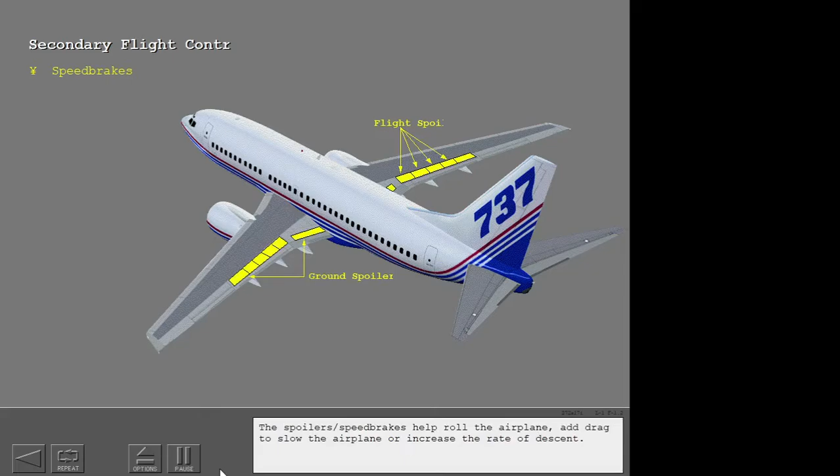The secondary flight controls add lift or drag and help in flight path adjustment. The spoiler speed brakes help roll the airplane, add drag to slow the airplane, or increase the rate of descent. The leading edge devices add lift for slower approach and landing speeds. The trailing edge flaps also add lift and drag for slower approach and landing speeds.

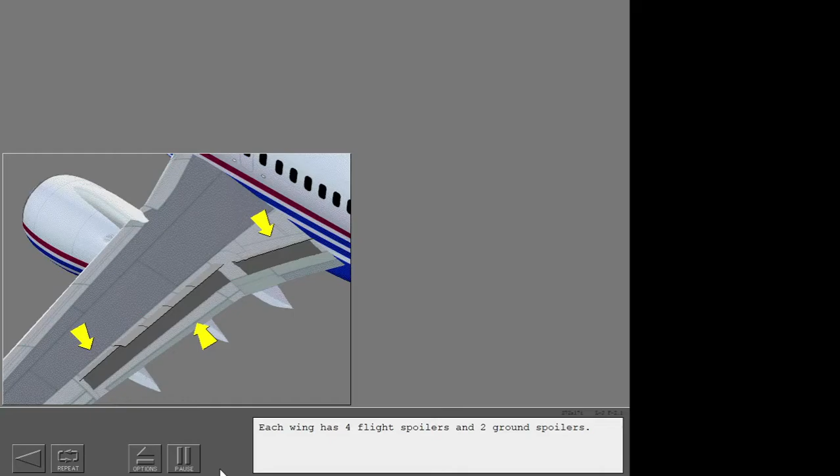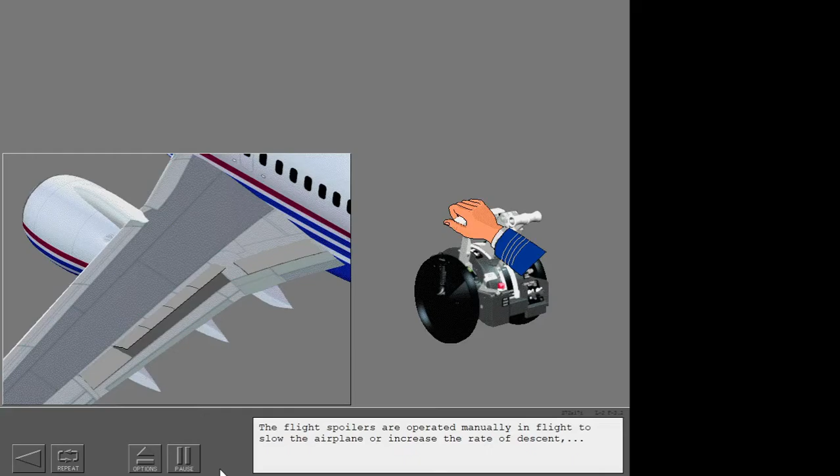Each wing has 4 flight spoilers and 2 ground spoilers. The flight spoilers are operated manually in flight to slow the airplane or increase the rate of descent, or automatically to help the ailerons in roll control. You must be careful when you operate the flight spoilers manually and the airplane is turned, because the airplane roll rate can quickly increase.

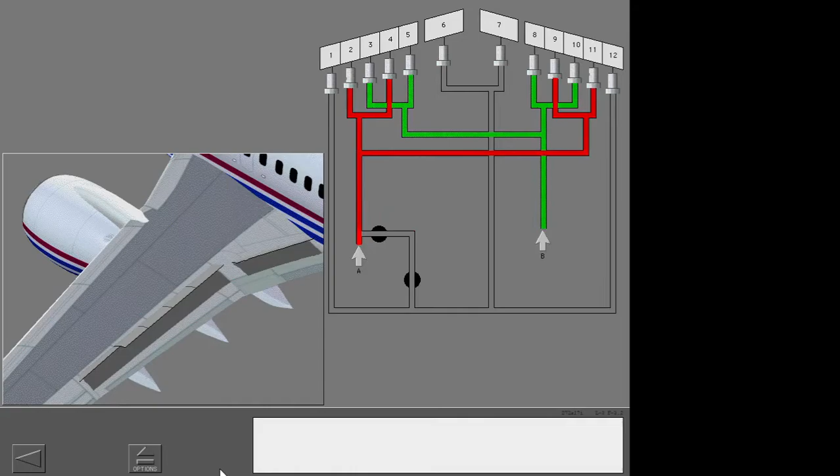The ground spoilers operate with the flight spoilers on the ground. The flight spoilers use hydraulic systems A and B. The ground spoilers use hydraulic system A.

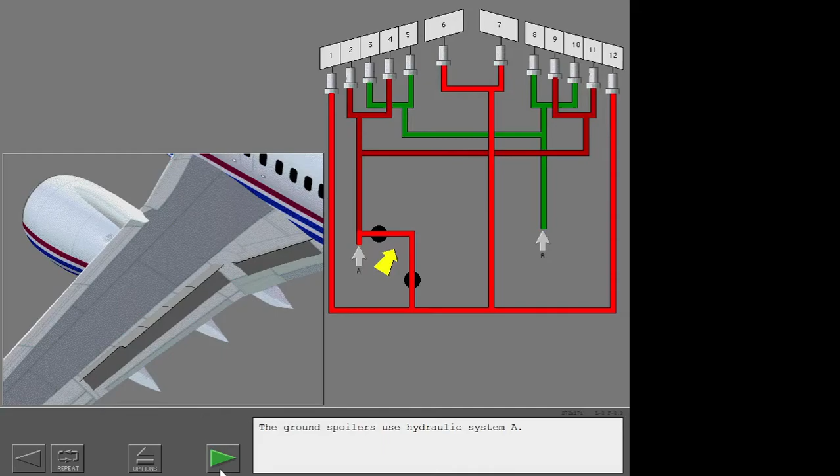The controls and indicators for the spoiler speed brakes are found here. The speed brake lever is on the captain's side of the control stand. In the down detent position, all flight and ground spoiler panels are down. The armed position is for automatic operation.

In the flight detent position, all flight spoilers extend to the maximum position. In the up position, all flight and ground spoilers extend to their maximum position. The up position is used only on the ground.

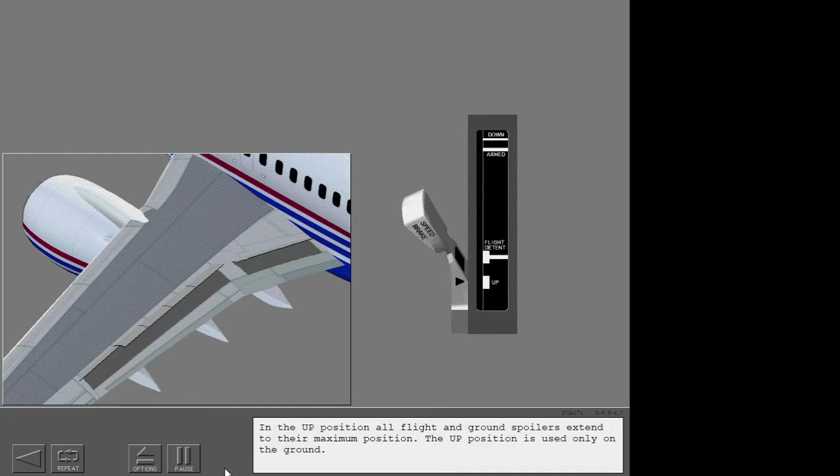The speed brake armed light is on the captain's instrument panel and shows that the speed brake system is armed for automatic inputs.

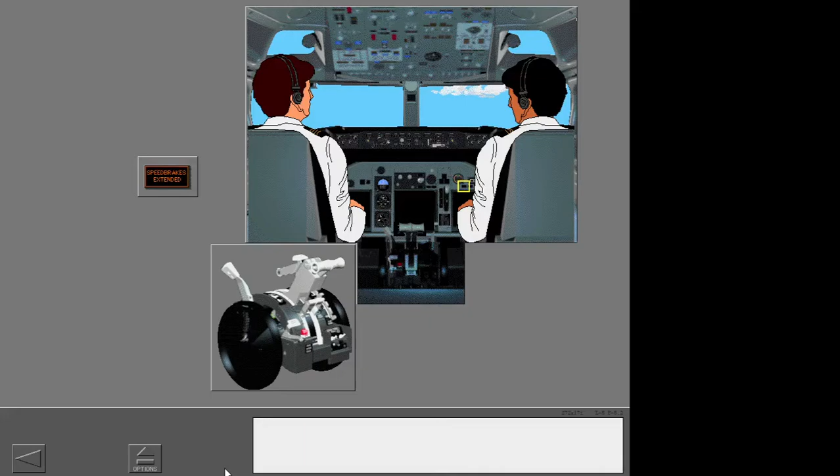The speed brake's extended light on the first officer's instrument panel illuminates in flight when the speed brake lever is out of the armed position, and the trailing edge flaps are extended to more than flaps 10, or radio altitude is less than 800 feet.

The speed brake's extended light illuminates on the ground when the speed brake lever is in the down detent position and the ground spoilers are not stowed.

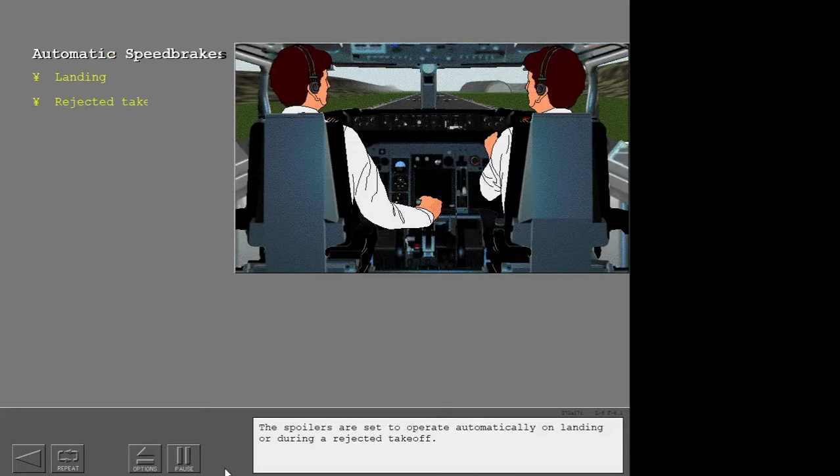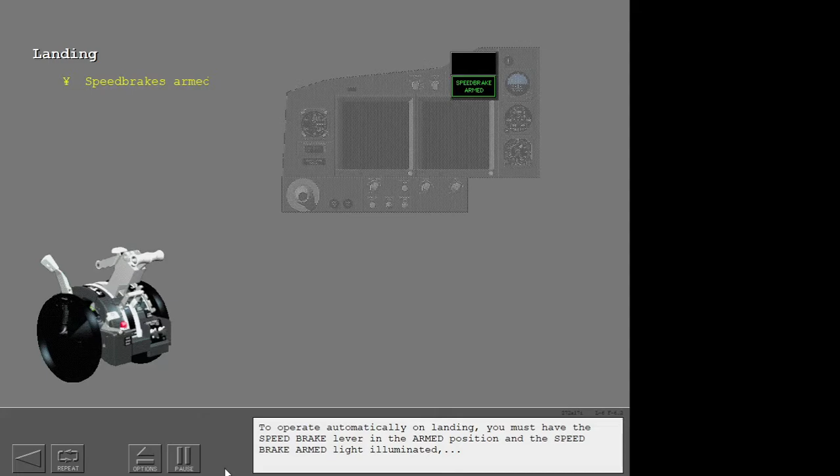The spoilers are set to operate automatically on landing or during a rejected takeoff. To operate automatically on landing, you must have the speed brake lever in the armed position and the speed brake armed light illuminated.

The thrust levers in the idle position, a main landing gear wheel speed of more than 60 knots, and a landing gear strut compression.

When the left main, right main, or nose gear strut compresses, the flight spoilers move up. When the right main gear strut compresses, the ground spoilers move up.

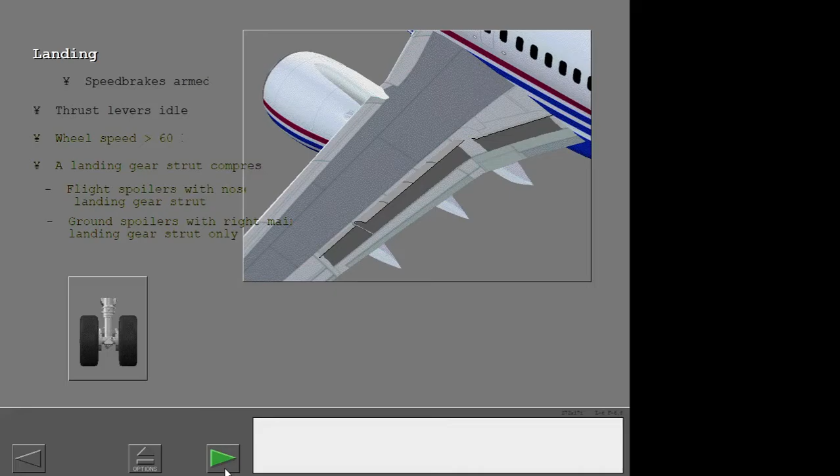During a rejected takeoff, all spoilers operate if the auto brake select switch is in the RTO position.

Main landing gear wheel speed is more than 60 knots, the thrust levers are in idle, and the reverse thrust levers are moved to reverse thrust.

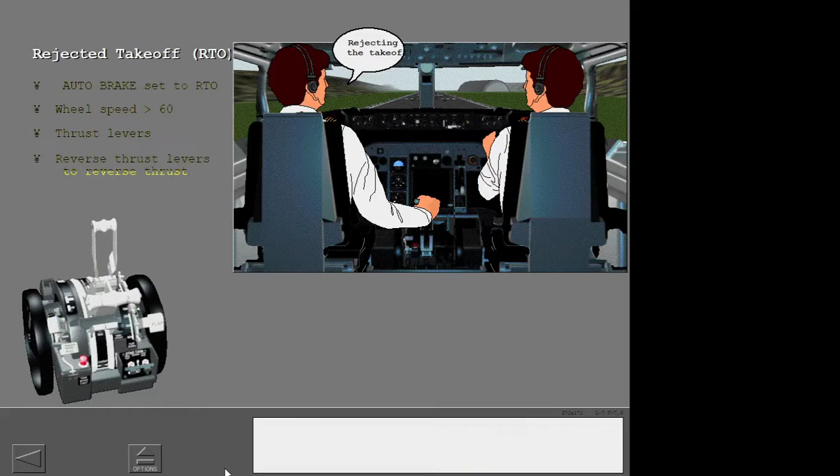The spoiler switches on the flight control panel are for maintenance use only.

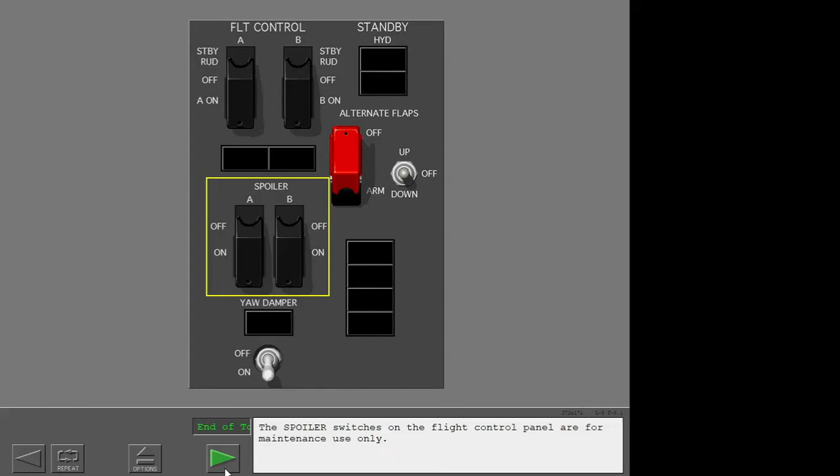The leading edge devices and trailing edge flaps are high lift devices that increase wing lift and decrease stall speed during takeoff, low speed flight, and landing.

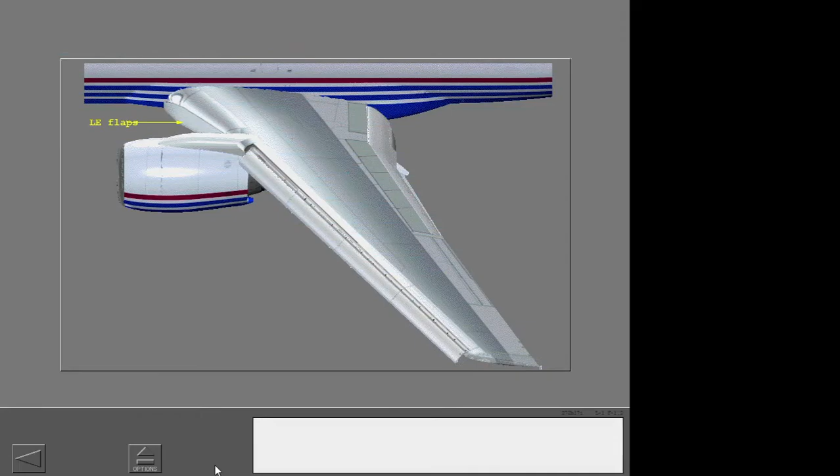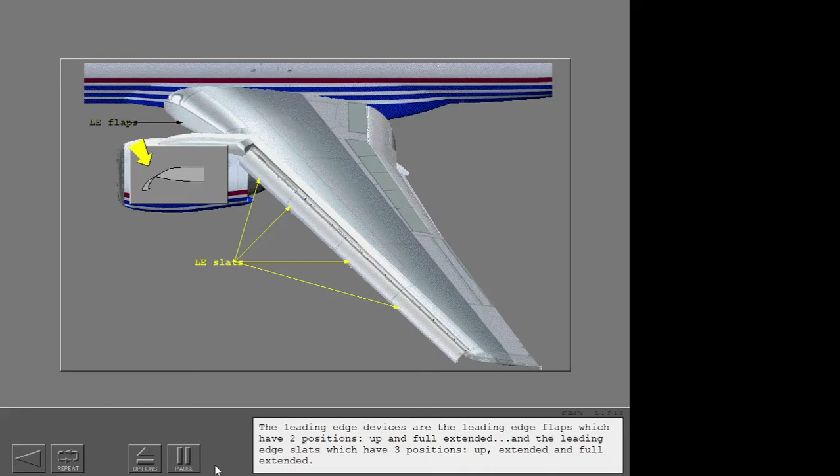The leading edge devices are the leading edge flaps, which have two positions, up and full extended. And the leading edge slats, which have three positions, up, extended, and full extended. The trailing edge flaps are double slotted.

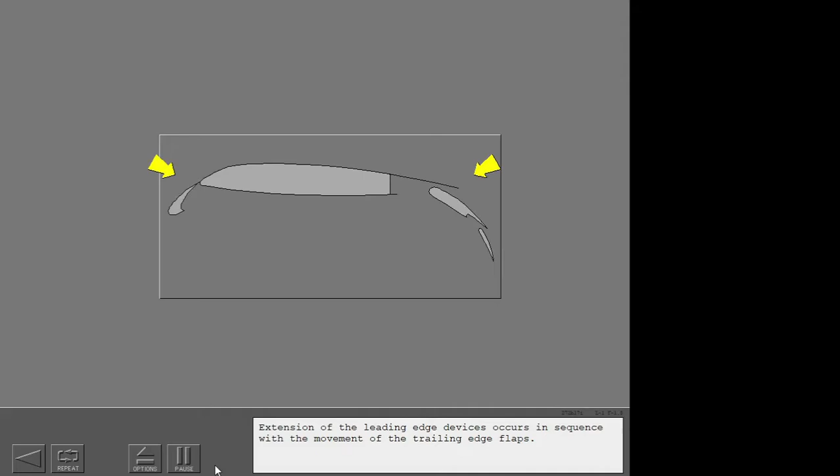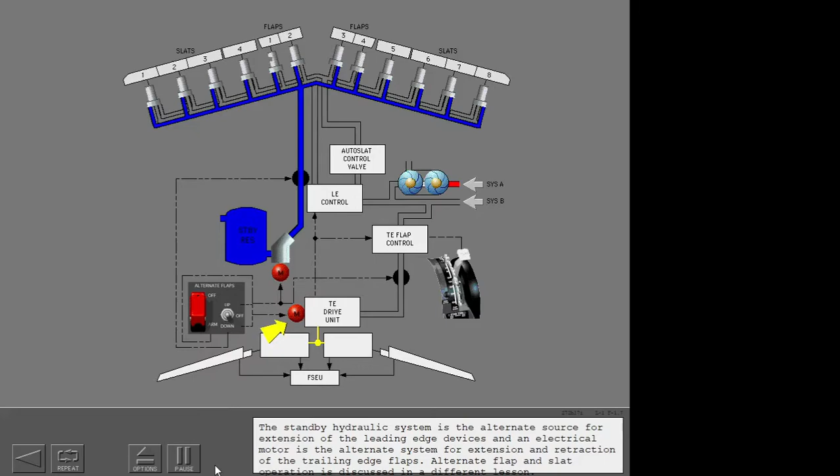Extension of the leading edge devices occurs in sequence with the movement of the trailing edge flaps. The leading edge devices and trailing edge flaps use hydraulic system B. The standby hydraulic system is the alternate source for extension of the leading edge devices. An electrical motor is the alternate system for extension and retraction of the trailing edge flaps. Alternate flap and slat operation is discussed in a different lesson.

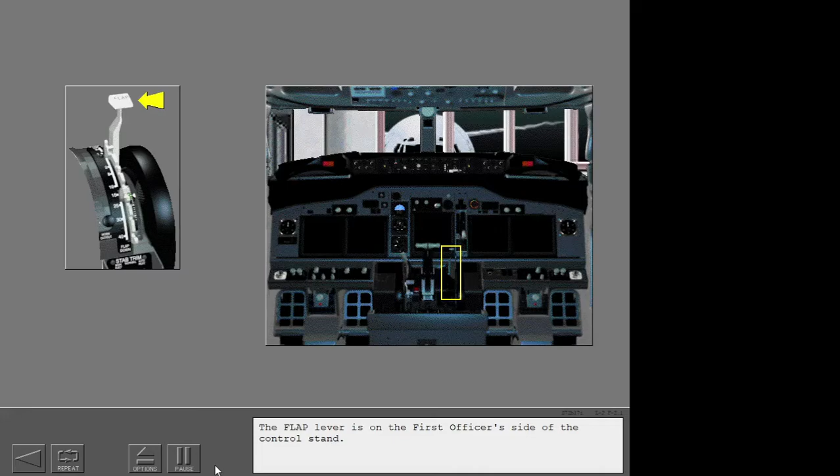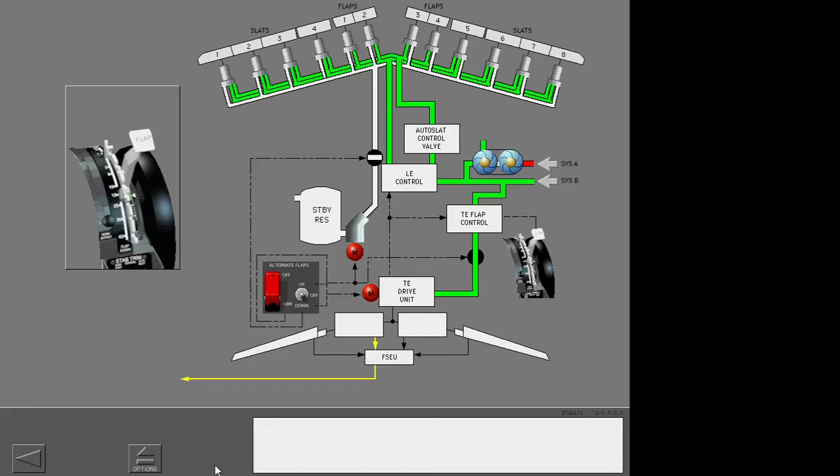The flap lever is on the first officer's side of the control stand. When the flap lever moves, the trailing edge flap control and leading edge control operate, and hydraulic pressure goes to the trailing edge drive unit and the leading edge slats. The flap position indicator shows the trailing edge flap positions.

Flap gates prevent accidental movement through position 15 during a single engine go-around and position 1 during a normal go-around. The flap's limit placard shows the maximum speed for each flap position.

The flap slat electronics unit, or FSEU, supplies trailing edge flap load relief from higher than normal airspeed for flaps 40 and 30.

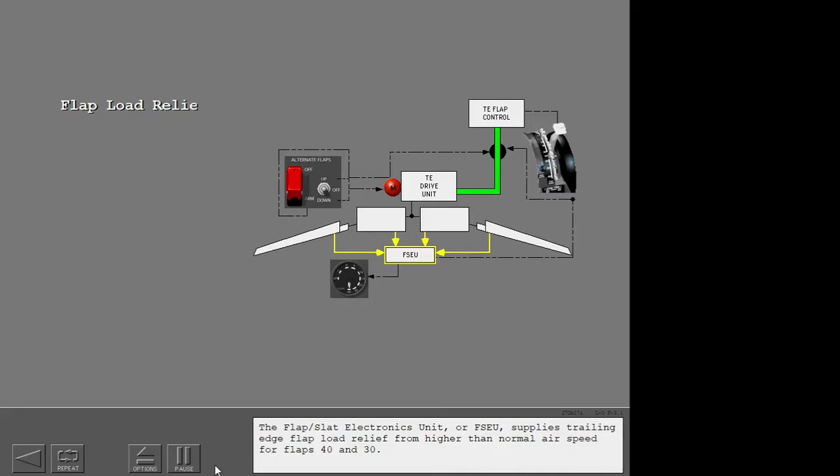The FSEU tells the flaps to retract from 40 to 30 if the airspeed is more than 163 knots. When the flap lever is set to 30, the flaps retract to 25 if the airspeed is more than 176 knots.

The flap lever does not move, but the flap position indicator shows the retracted position. The flaps extend to the set position when the airspeed decreases below 158 knots for flaps 40, or below 171 knots for flaps 30.

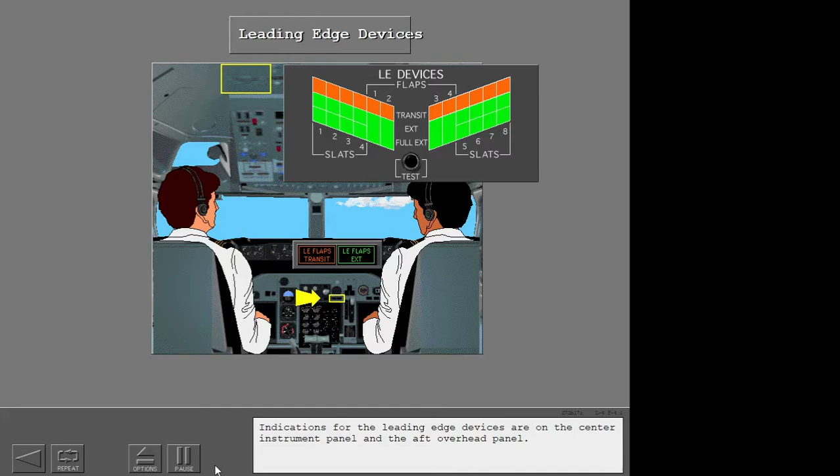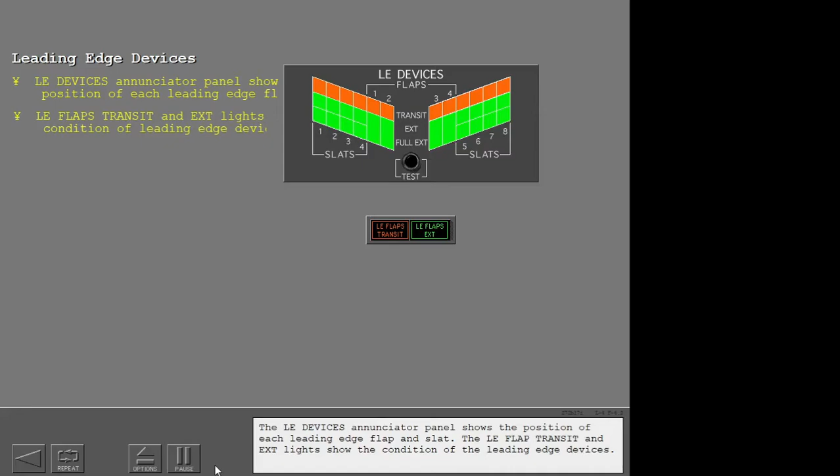Indications for the leading edge devices are on the center instrument panel and the aft overhead panel. The leading edge devices annunciator panel shows the position of each leading edge flap and slat. The leading edge flap transit and extended lights show the condition of the leading edge devices. When all the lights extinguish, the devices are retracted.

The amber leading edge devices transit lights and leading edge flap transit light illuminate when the leading edge devices are in transit or not in the correct position. The green leading edge devices extended or full extended lights illuminate when the leading edge devices are in the correct position.

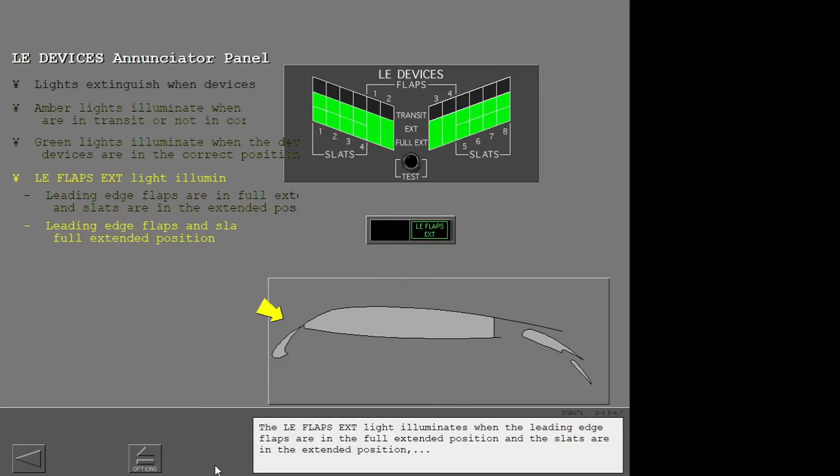The leading edge flap's extended light illuminates when the leading edge flaps are in the full extended position and the slats are in the extended position, or the leading edge flaps and slats are in the full extended position.

Push and hold the test switch. The test switch illuminates all annunciator panel lights.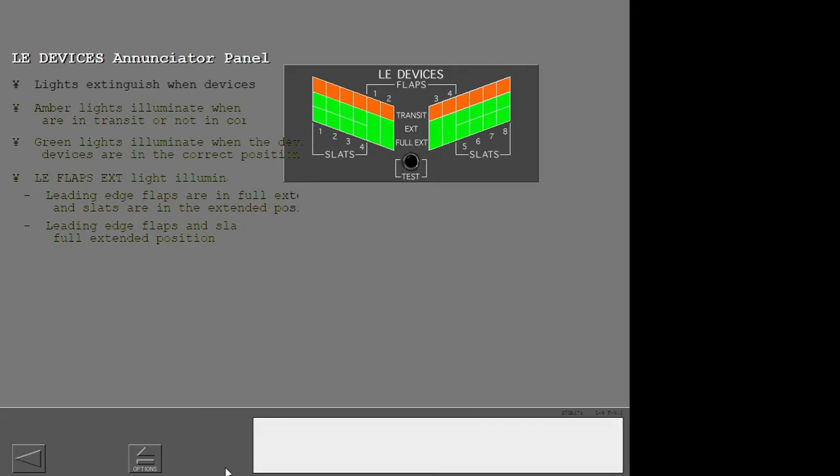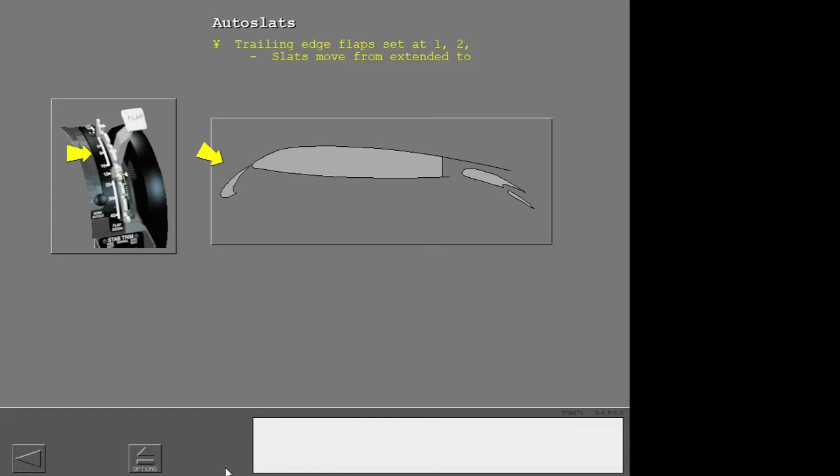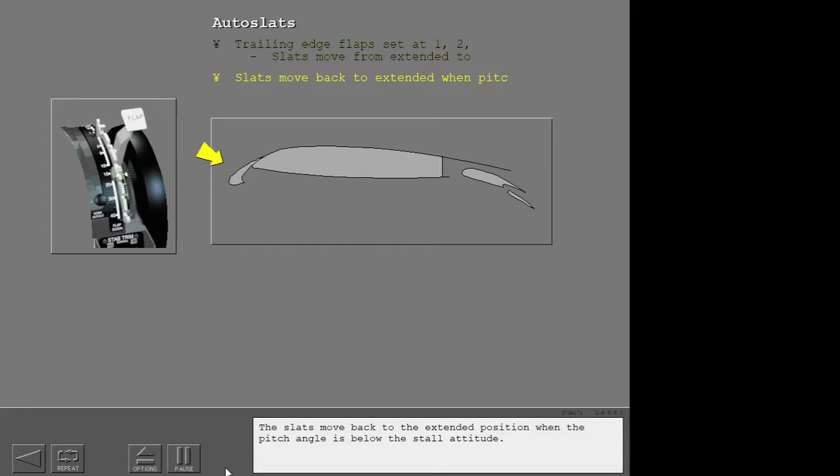The auto-slat system increases wing lift if the airplane approaches a stall during takeoff or approach to landing. With the trailing edge flaps set at 1, 2, or 5, the auto-slat system moves the leading edge slats from extended to the full extended position before stick shaker. The slats move back to the extended position when the pitch angle is below the stall attitude.

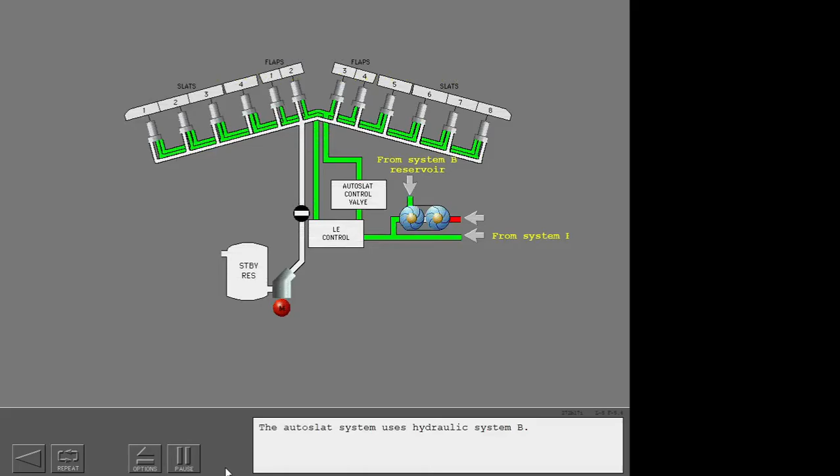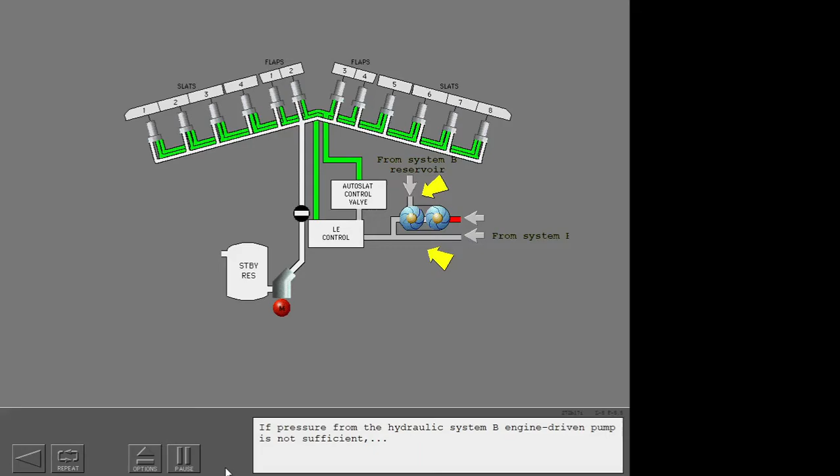The auto-slat system uses hydraulic system B. If pressure from the hydraulic system B engine-driven pump is not sufficient, the Power Transfer Unit, or PTU, uses hydraulic system A to pressurize system B for auto-slat operation.

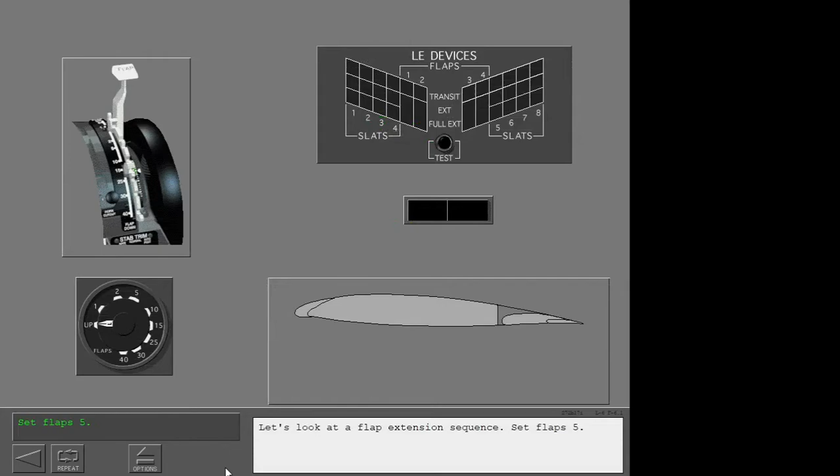Let's look at a flap extension sequence. Set flaps 5. When the flap lever is set at 5, the trailing edge flaps move from the up position and the leading edge devices start to extend. The leading edge flap's transit light and leading edge device's transit lights illuminate.

When the trailing edge flaps near the 1 position, the leading edge flaps are at full extended. The slats are at extended, and the leading edge flap's extended light illuminates.

Set flaps 40. When the trailing edge flaps move from flaps 5 to flaps 10, the slats move to full extended. The lights again show in transit and then full extended. Only the trailing edge flaps continue to extend from flaps 10 to flaps 40.

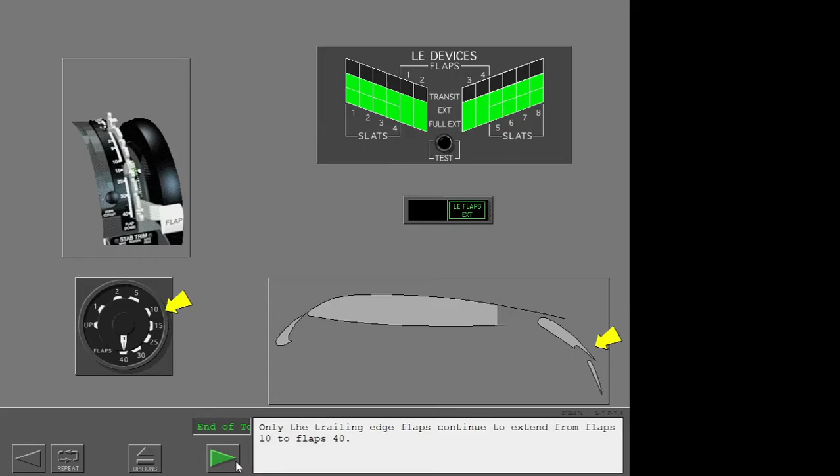Let's look at the non-normal conditions related to secondary flight controls. The speed brake Do Not Arm light is on the captain's instrument panel and shows the automatic speed brake system is inoperative. During the landing roll, you must manually move the speed brake lever to up.

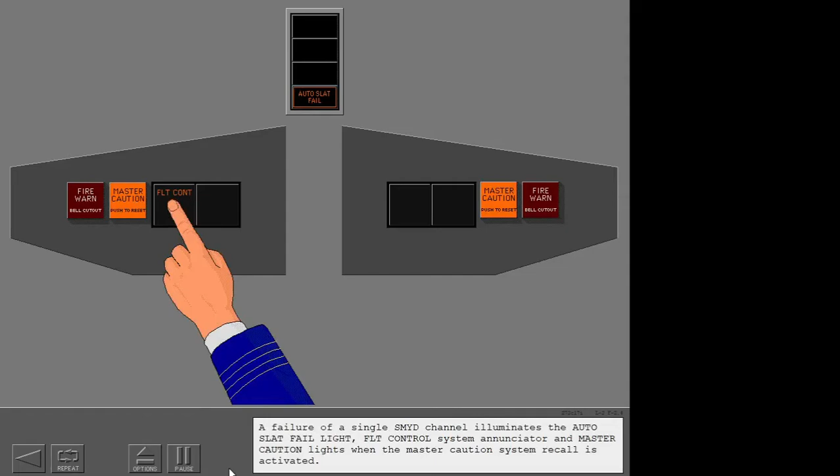The auto-slat fail light illuminates when the auto-slat system is not available. The flight controls system annunciator and master caution lights illuminate. A failure of a single SMYD channel illuminates the auto slat fail light, flight control's system annunciator, and master caution lights when the master caution system recall is activated. No crew action is required for an auto slat system failure.

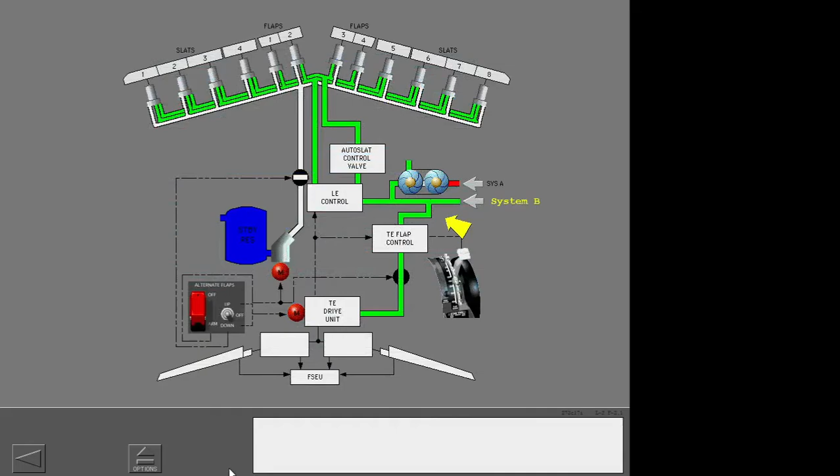If hydraulic system B does not operate, the standby hydraulic system is the alternate source for extension of the leading edge devices, while an electrical motor is the alternate system for extension and retraction of the trailing edge flaps. The alternate flaps master switch and position switch control the alternate flap system.

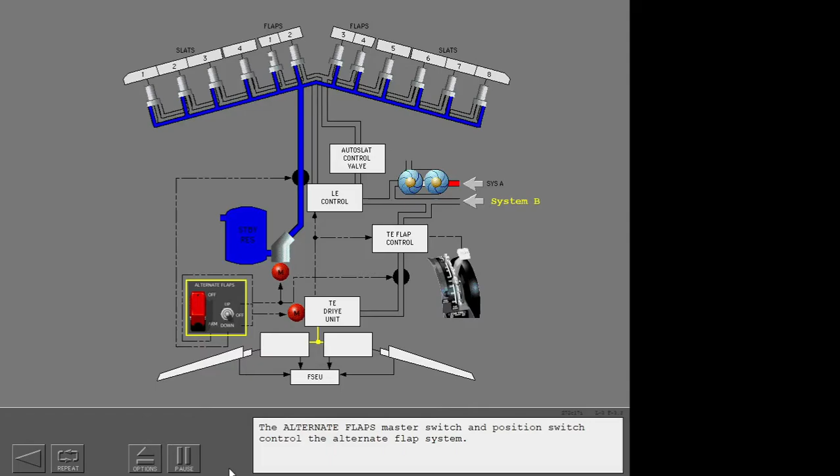Open the guard and move the master switch to arm. When the alternate flap master switch is in the arm position, the alternate flaps position switch is armed. The standby hydraulic pump turns on, and the trailing edge flap bypass valve closes.

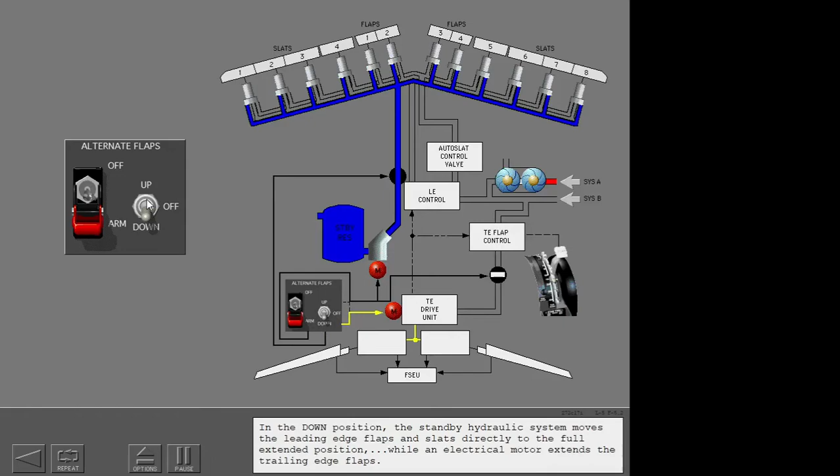Next, move the alternate flaps position switch to down. In the down position, the standby hydraulic system moves the leading edge flaps and slats directly to the full extended position, while an electric motor extends the trailing edge flaps. The down position is spring-loaded and must be held until the flaps reach the correct position.

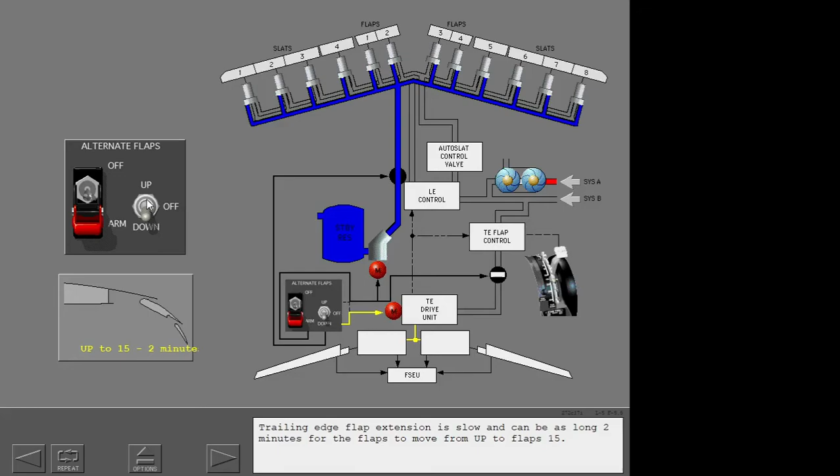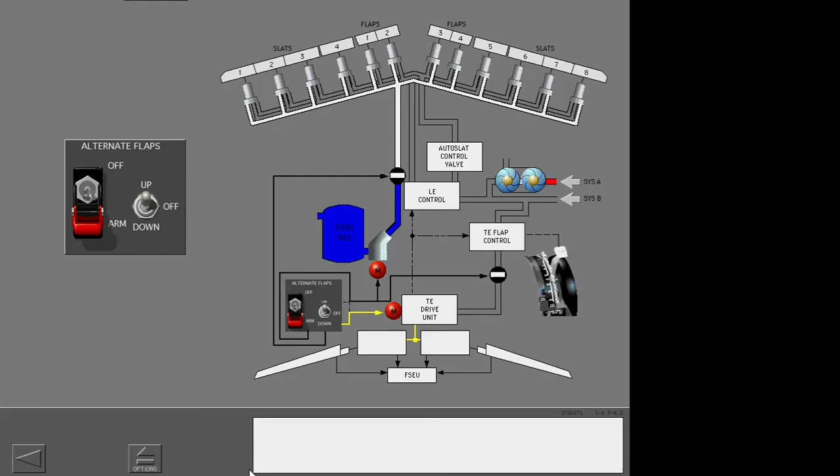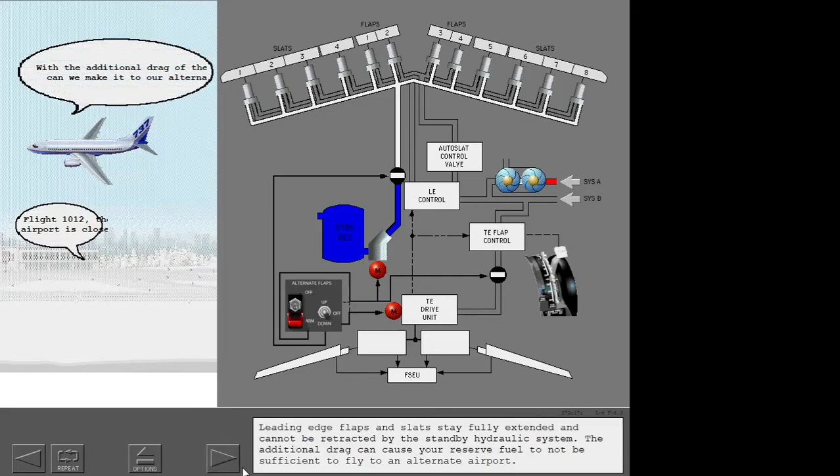Trailing edge flap extension is slow and can be as long as 2 minutes for the flaps to move from up to flaps 15. To retract the trailing edge flaps, move the alternate flaps position switch to up. The up position is magnetically held. Leading edge flaps and slats stay fully extended and cannot be retracted by the standby hydraulic system.

The additional drag can cause your reserve fuel to not be sufficient to fly to an alternate airport.

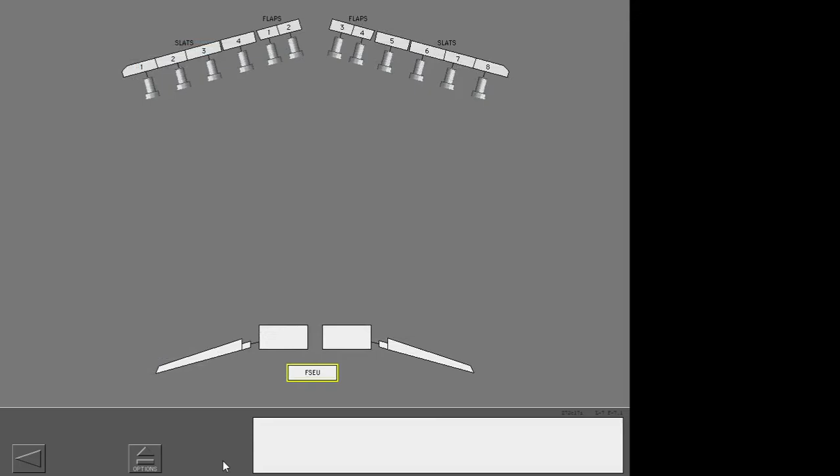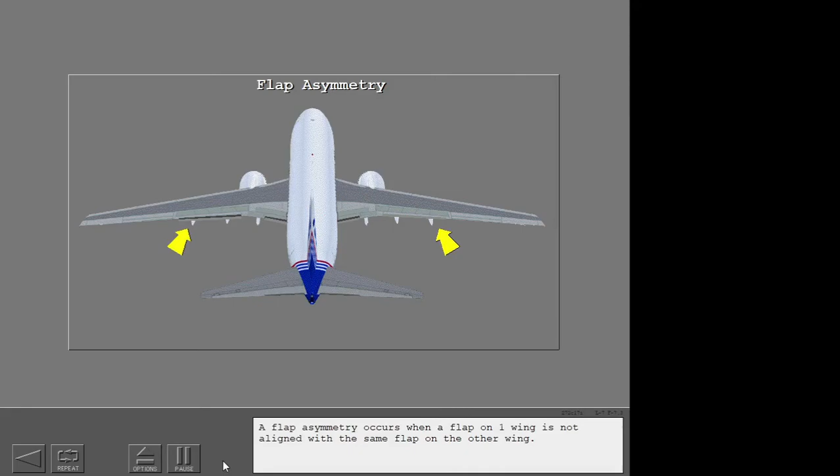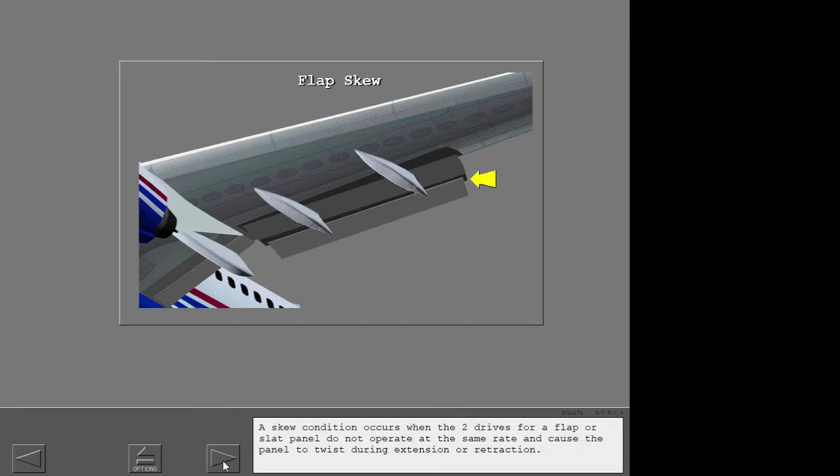The FSEU monitors the trailing edge flaps for asymmetry and skew conditions, the leading edge devices for an incorrect position, and the leading edge slats 2 through 7 for a skew condition. A flap asymmetry occurs when a flap on one wing is not aligned with the same flap on the other wing. A skew condition occurs when the two drives for a flap or slat panel do not operate at the same rate and cause the panel to twist during extension or retraction.

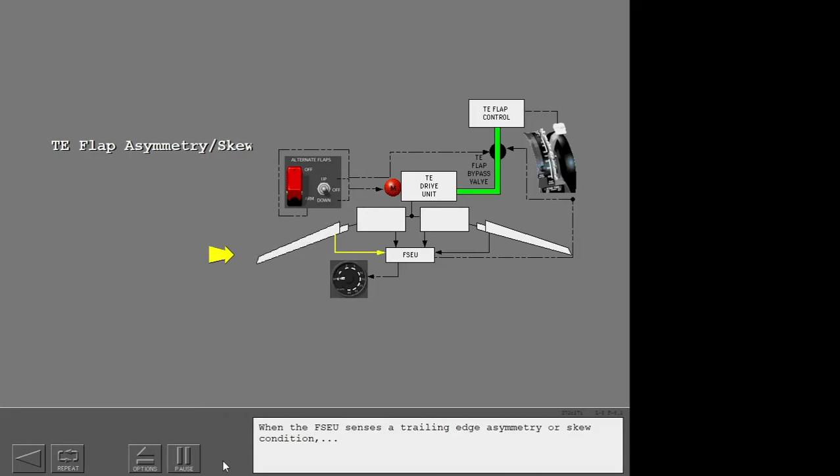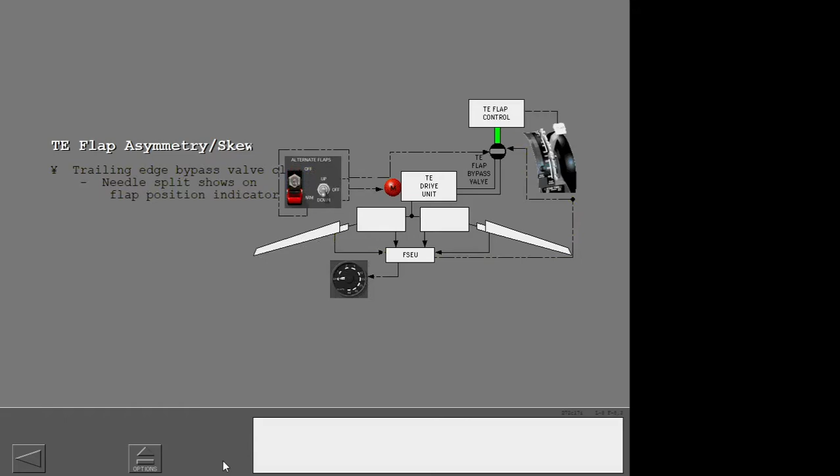When the FSEU senses a trailing edge asymmetry or skew condition, the FSEU closes the trailing edge bypass valve and you see a needle split on the flap position indicator. If an asymmetrical trailing edge flaps condition exists, do not attempt to move the trailing edge flaps with the alternate flaps position switch. There is no asymmetry or skew protection when the alternate flap extension system is used.

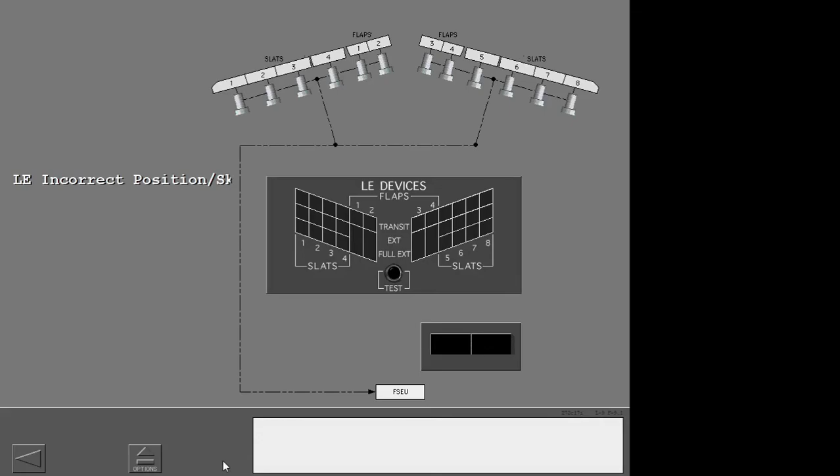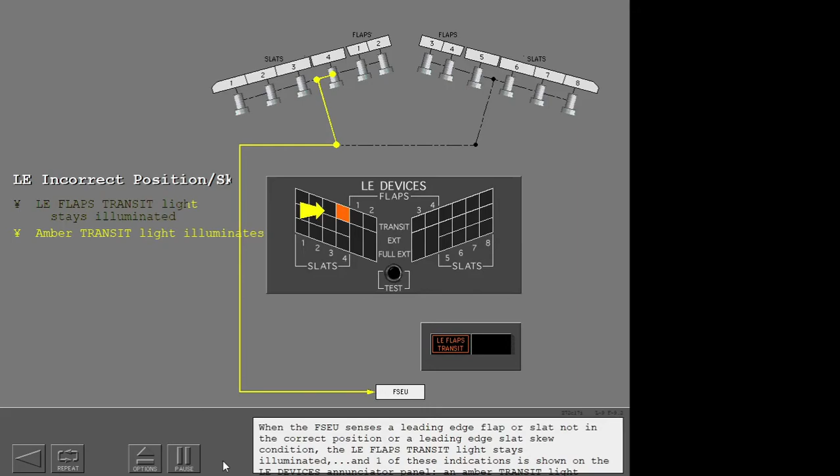When the FSEU senses a leading edge flap or slat not in the correct position, or a leading edge slat skew condition, the leading edge flap's transit light stays illuminated. And one of these indications is shown on the leading edge device's annunciator panel: an amber transit light illuminates, an incorrect green extended or full extended light illuminates, or no lights illuminate.

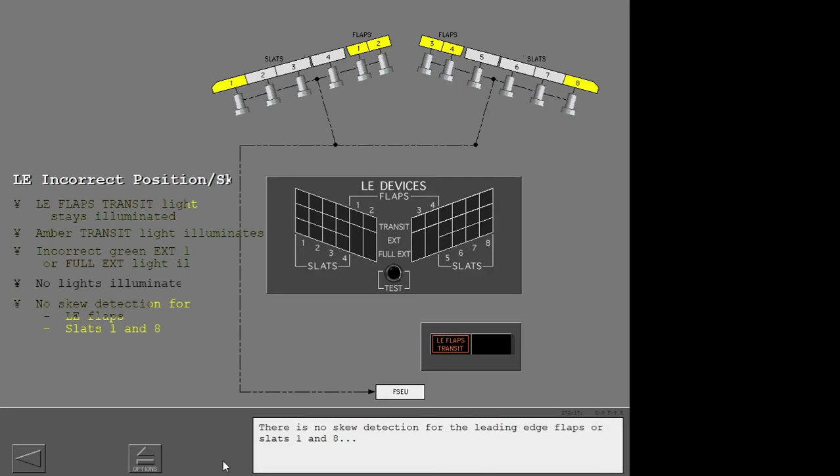There is no skew detection for the leading edge flaps or slats 1 and 8, and a slat skew is not monitored during autoslat operation.

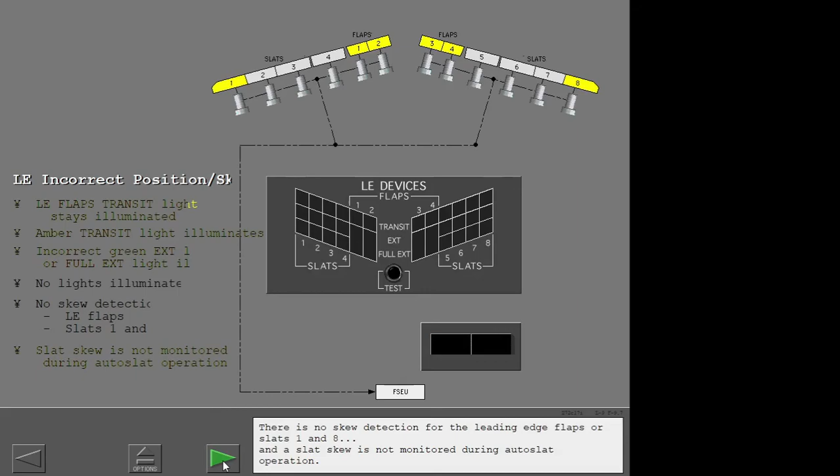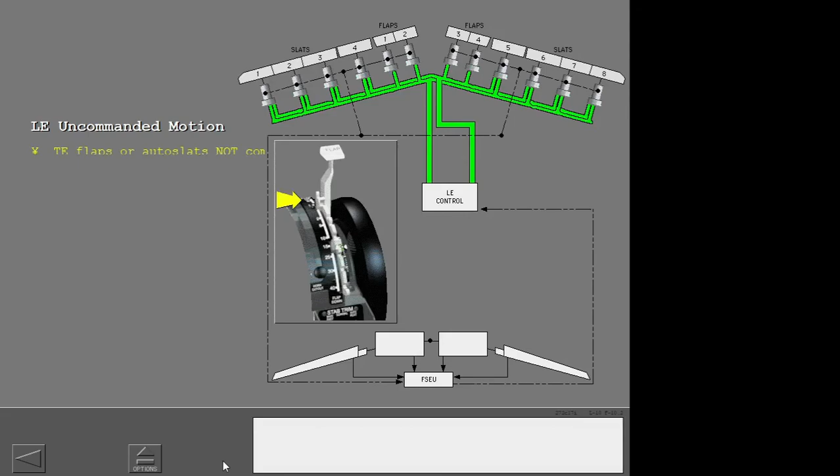The FSEU also monitors uncommanded motion of the leading edge devices or trailing edge flaps. Uncommanded motion for a leading edge device occurs when the trailing edge flaps or autoslats are not commanded, and two leading edge flaps move on one wing, or two or more slats move on one wing.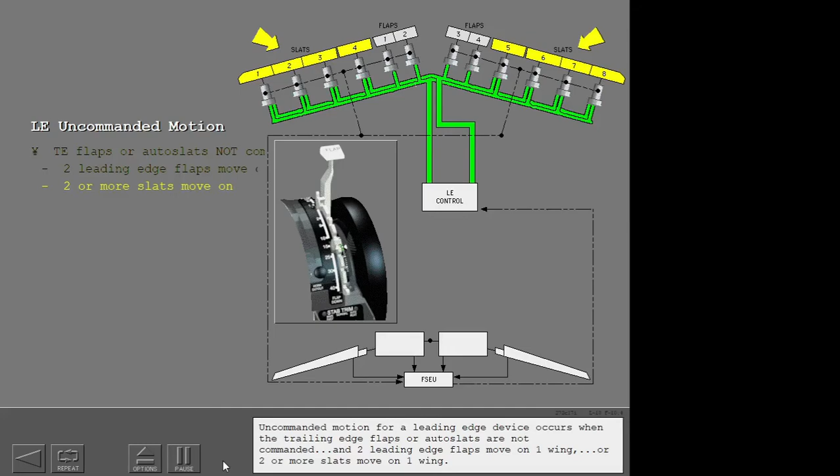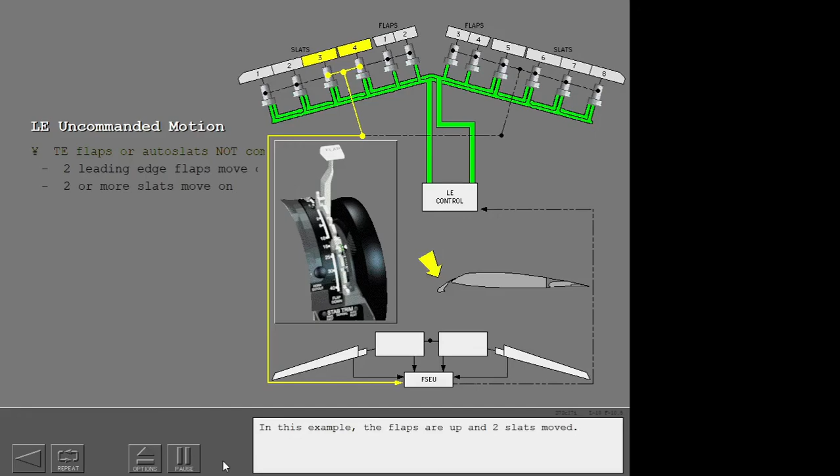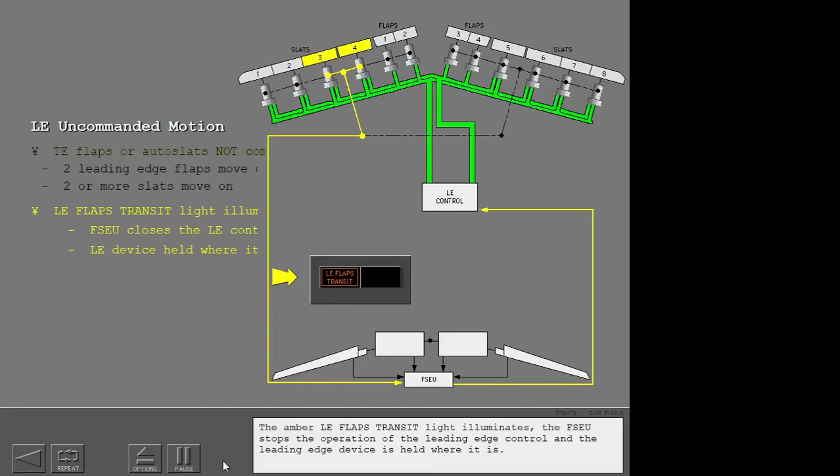In this example, the flaps are up and two slats moved. The amber leading edge flaps transit light illuminates, the FSEU stops the operation of the leading edge control, and the leading edge device is held where it is.

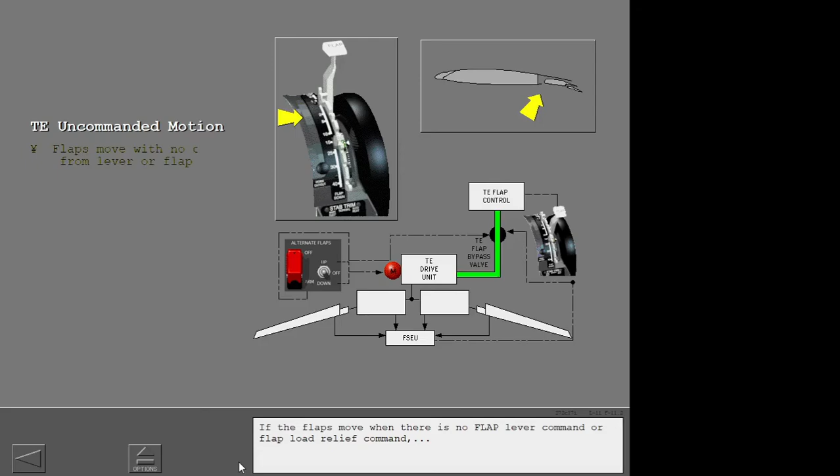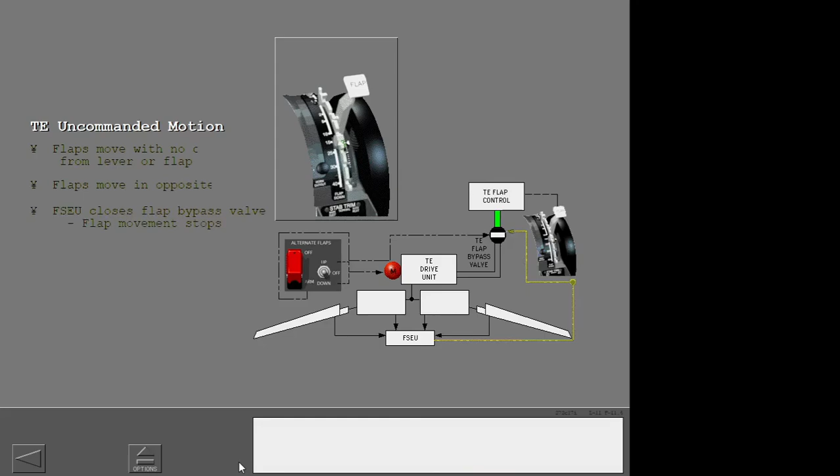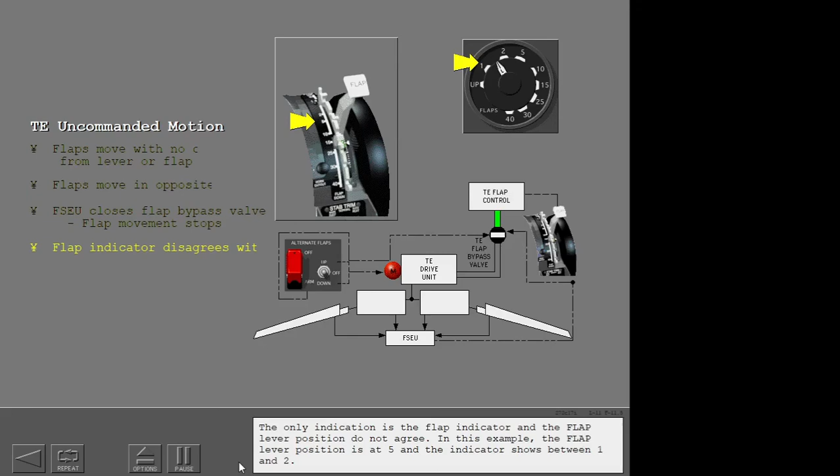The FSEU monitors the trailing edge flap position and compares it to the commanded flap position. If the flaps move when there is no flap lever command or flap load relief command, or they move in the opposite direction of the flap lever, the FSEU closes the flap bypass valve and the flap movement stops. The only indication is the flap indicator and the flap lever position do not agree. In this example, the flap lever position is at 5 and the indicator shows between 1 and 2.

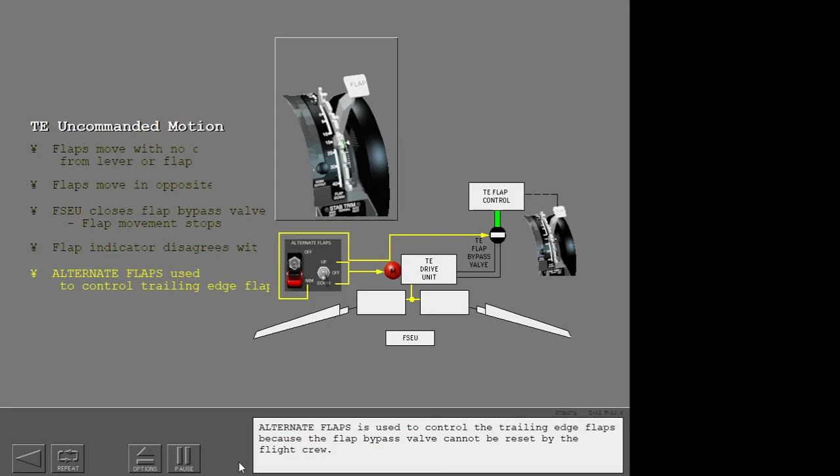Alternate flaps is used to control the trailing edge flaps because the flap bypass valve cannot be reset by the flight crew. Remember, there is no asymmetry or skew protection when the alternate flap extension system is used.